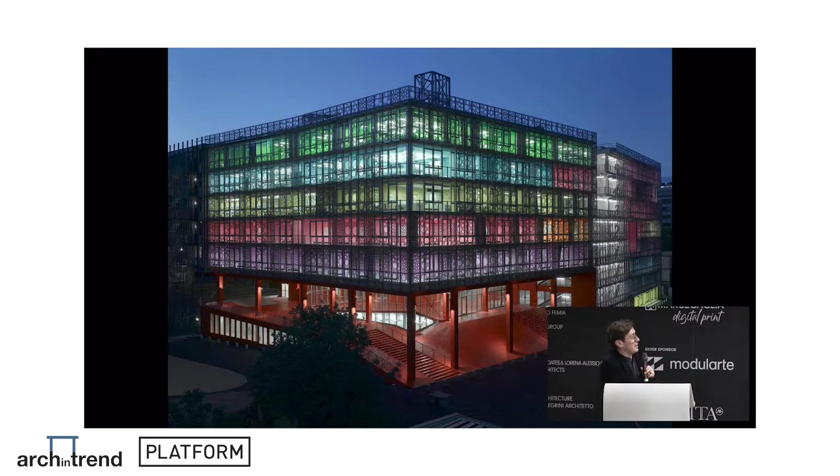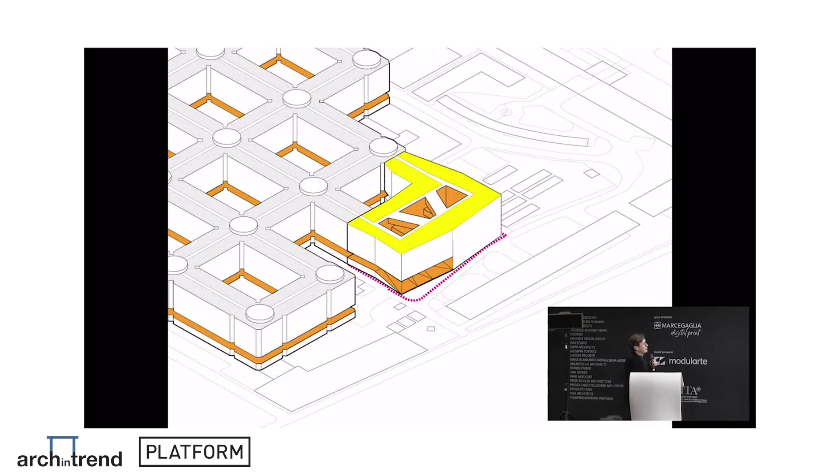Some projects known by us - I'll present a few to introduce my lecture. One is a university built in Paris some years ago, in the center of the city: Pierre et Marie Curie University. It was made in continuation of a very interesting project from the 60s, a grid. The university has the form of a grid, and we had the chance to participate in the competition to make an extension of it. We proposed a strange form that sticks to the grid but invents inside a huge atrium system of 3 atriums, giving a better way to express the relation between the transportation of students inside the building and the exchange of ideas.

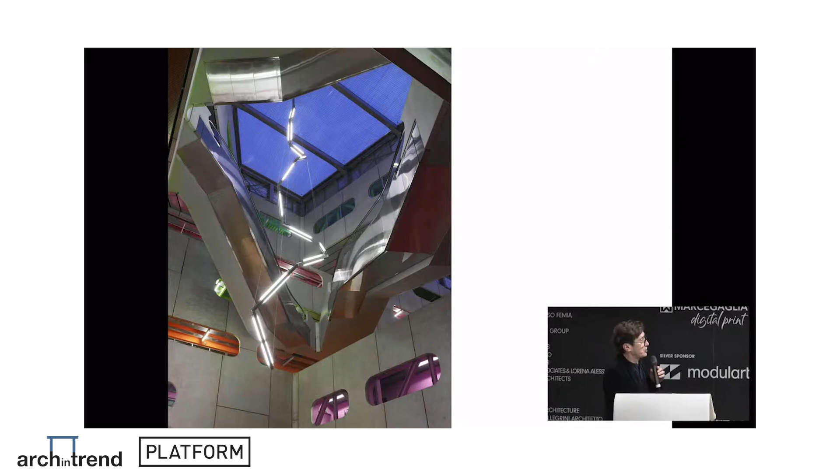We have another project in Paris currently - a huge program around Paris to create a large metro line circling the city. In this large project, we have the chance to build a station within this global line of 60 stations.

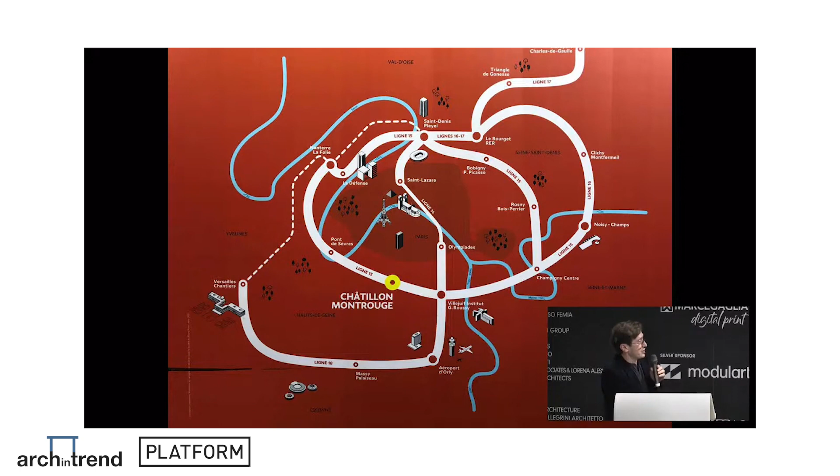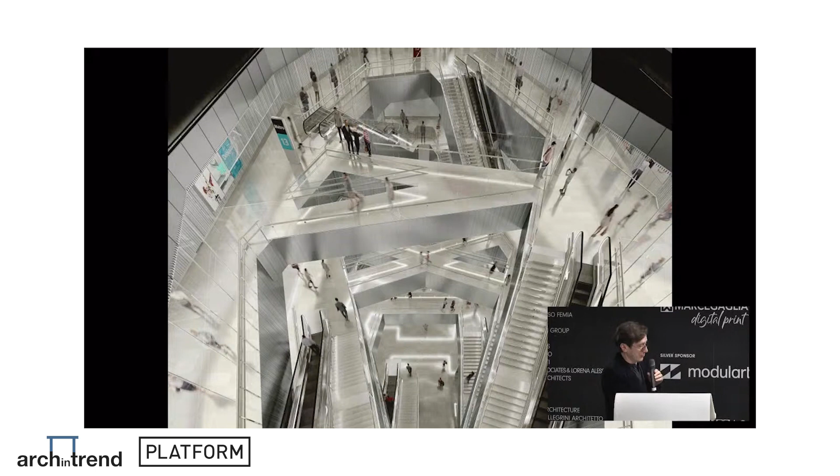We also built a project in the south of Paris, Châtillon-Montrouge. This one is linked to the first project because it deals with the transportation of people going down to the bank of the metro, and we tried to invent a special path inside this pyramidal volume, joining the tube actually under construction.

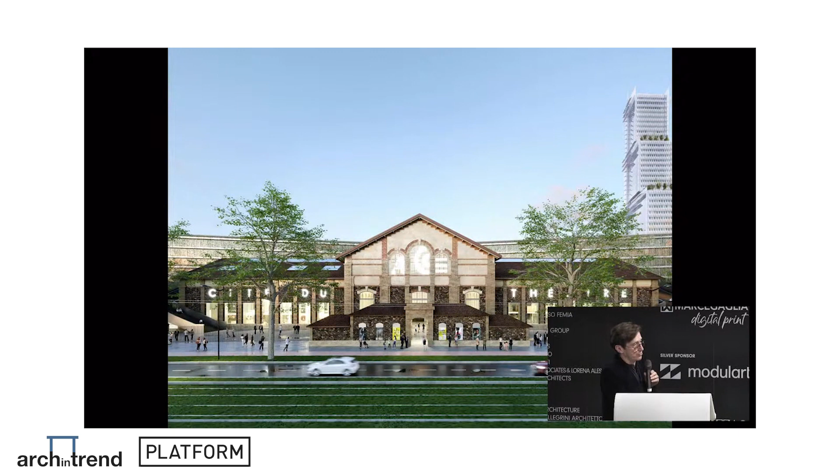The last project, currently under study in Paris, is called Cité du Théâtre. It's made with us and Nieto Sobejano, a firm from Madrid, and we have the chance to run together a huge program of theater rooms - 7 theater rooms and a school of theater - close to the project of Renzo Piano's Tribunal in the north of Paris. It's a refurbishment of old warehouses for the Paris Opera set, built by Charles Garnier. We extend this huge warehouse program with a garden and a long building, and inside the warehouse and under the garden we put the 7 theater rooms.

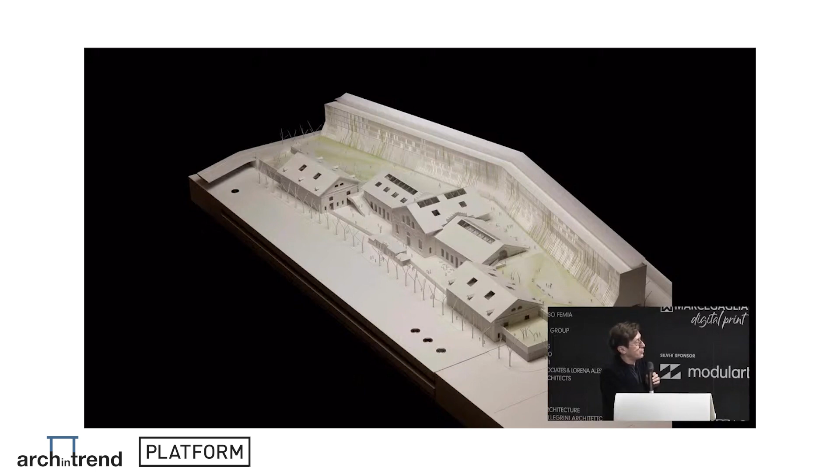Arriving at the project that is the aim of this presentation: it's a library built on a small French island in the Indian Ocean, very far from Paris - 11 hours of flying between Paris and Réunion Island. It's close to Île Maurice, between Île Maurice and Madagascar, a fantastic island formed by a volcanic system.

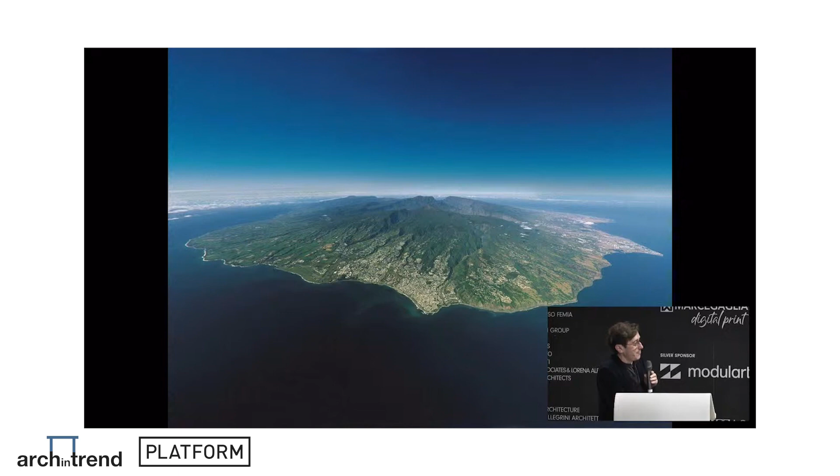It's a sort of paradise in some ways, because you are in very rough nature in the center of the island, and at the same time very close to the beach. There is a lot of investment in this small island to find a good level of quality of living for the inhabitants, and especially the city of St. Paul, on the west coast of the island, decided to extend the center of the city along the new road that follows the coast.

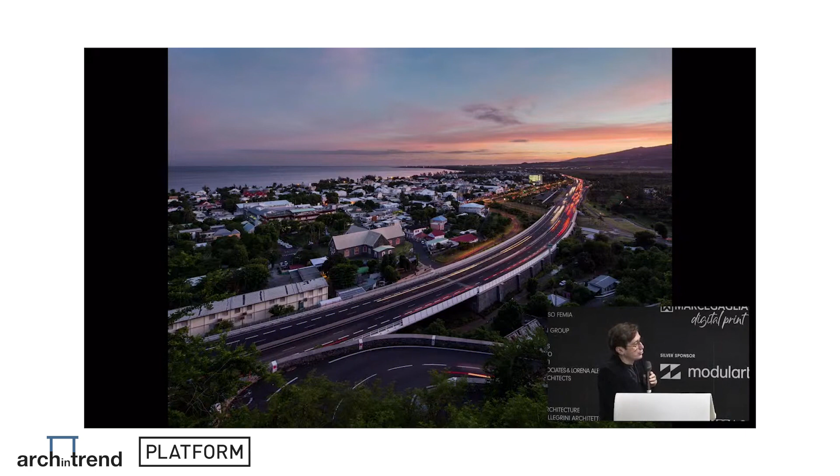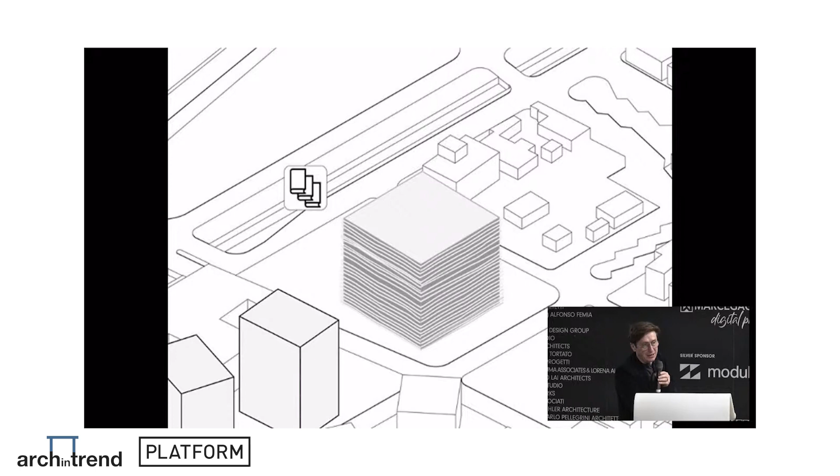For this project it was a huge library program, because the client, the mayor of St. Paul, wanted to give a good element for young people - to create a new school of Creole writing. In this French island there is a special native language called Creole, and many great writers come from the Antilles, but not many from this part of the Indian Ocean. Because there was a big lack of libraries, of places to learn literature and writing, the mayor wanted to create a huge library program able to help young people learn more Creole writing.

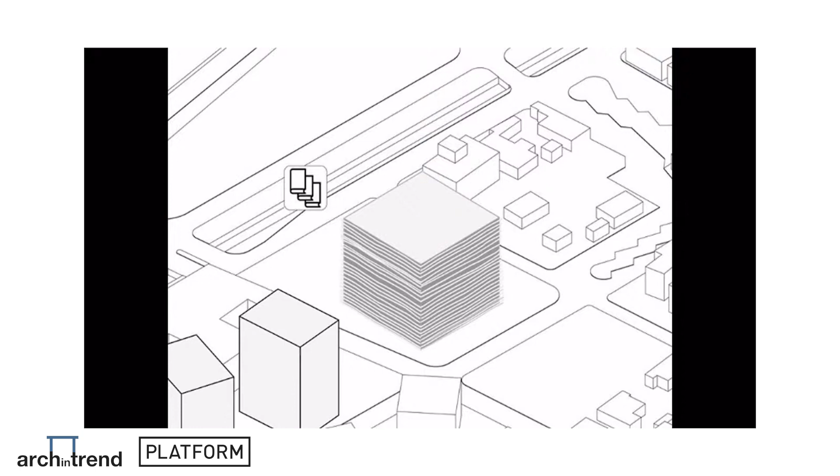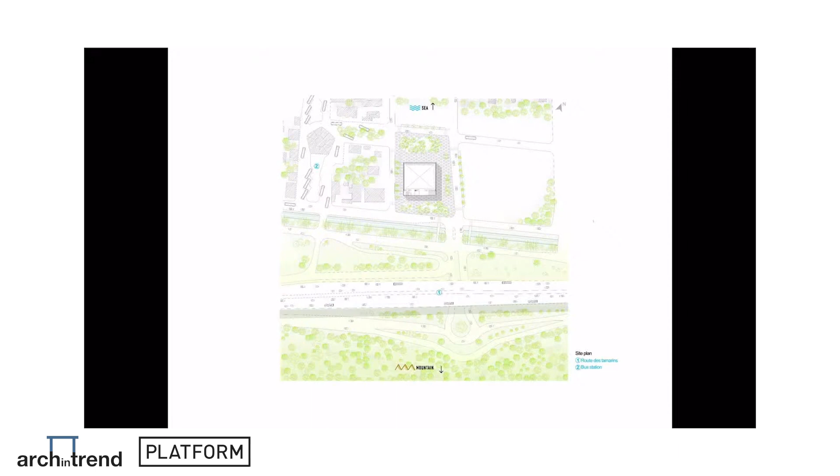The project takes place at the limit between the beach and the beginning of the volcano ramp slope. It has a very basic form, because when we began working on this project, we wanted to link this new program with a powerful effort on ecology and ventilation systems. We didn't want, as is often done on these islands, to just put climatization supply inside the building to reach the right temperature. Instead we worked on a very basic form, able to work with the coastal wind and help it pass through the building to give the right quality of temperature.

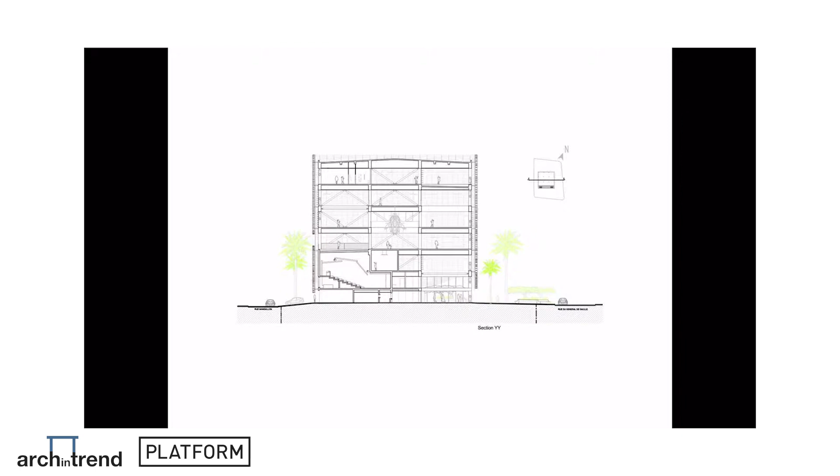The building is a sort of stacking of levels, very open to the outside. Each level is more or less the same, with a large terrace and an inside part. On each level we created a natural ventilation system that goes through the building and gives a good climate inside.

This building is finalized and built, with a facade that is a series of Venetian blinds which can be opened to create a sort of eye, looking from the building to the outside and from the outside to the building.

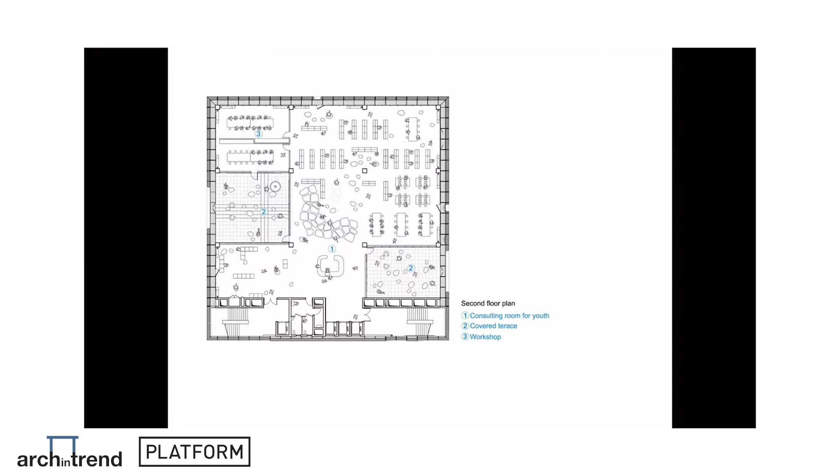Each level has a very simple plan, able to be refurbished during the life of the building. The facade is more or less 1 meter deep, with an exterior shade and an inside glass facade that could be completely open. It's called Ventel.

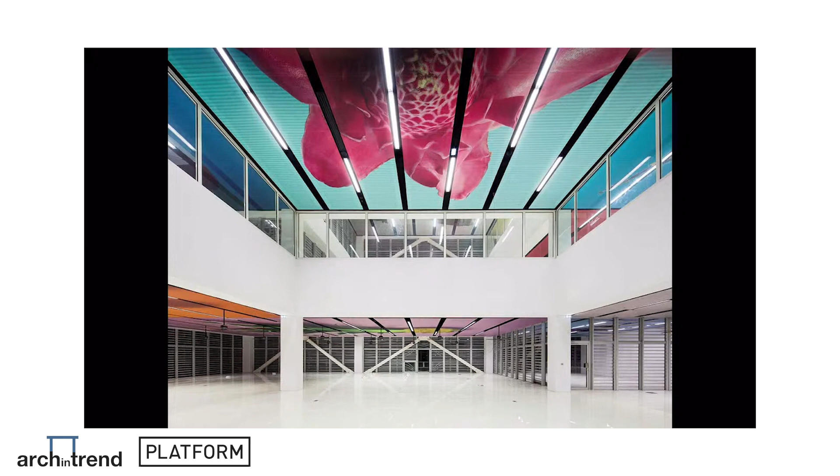Is there a double-height part for the lecture room? The particularity of this building is that we worked with an artist who designed a special printed ceiling on linen, suspended to create, from outside, a sort of stacking of images that you can see at night through the facade - a little like when you quickly open a book and glimpse a look from inside the building.

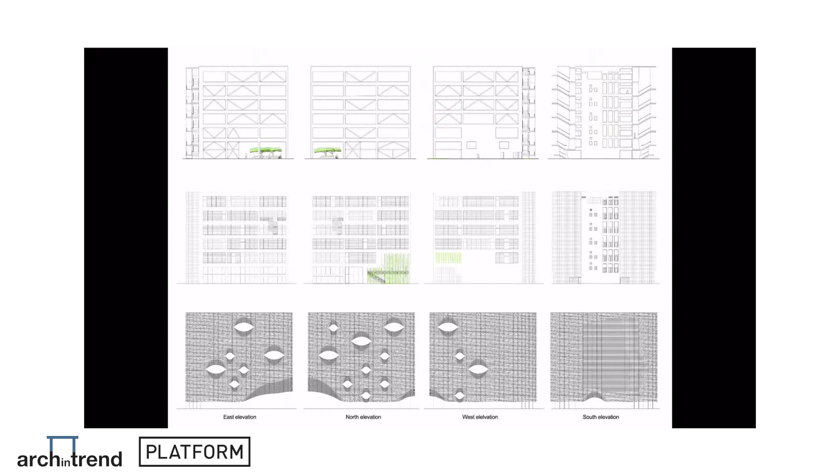The design of the facade uses different lines - it looks very specific, but inside there are actually very few different pieces, organized specially across the whole facade.

The view is amazing when you're on the upper levels of the building - on one side you see the sea, on the other side a view of the mountain. At night you can see the main road that follows the coast.

The change of light is very intense on this tropical island, and the quality of the facade changes during the day. It's aluminium cladding for the outside shading, and it changes along with the daylight.

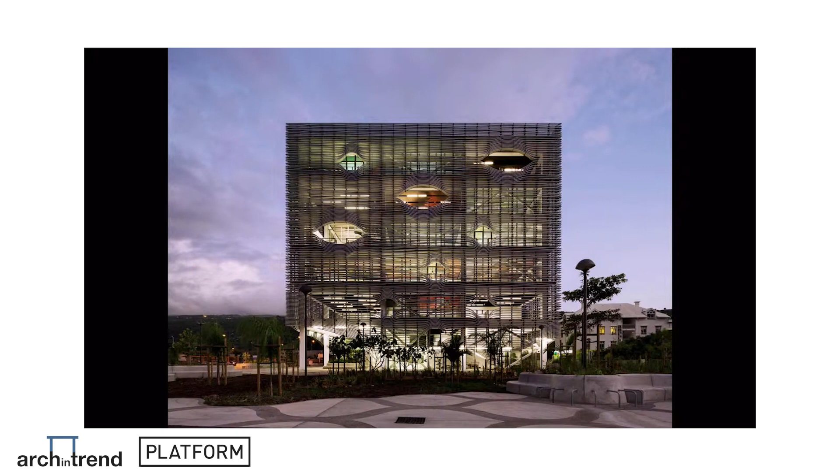The effect from inside to outside at night, when you see the ceiling printing at the top of each room.